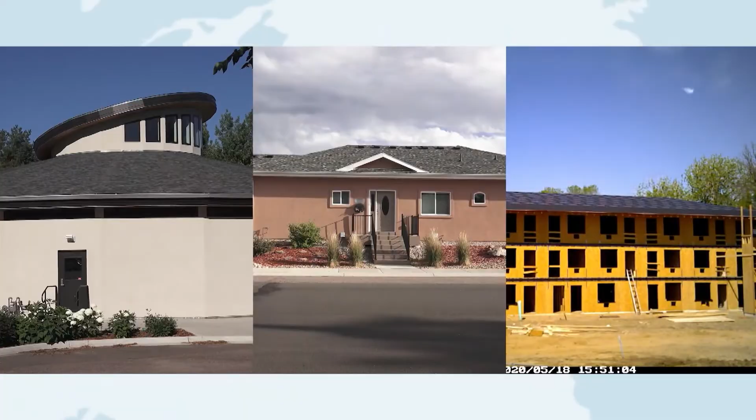Hi, I'm Paul Kriescher. For the past quarter of a century, I've worked to create more energy efficient homes and buildings. I'm fascinated by the technical aspects and cutting edge ideas from people who are pushing the boundaries in their projects. Equally important to me is the why behind the plan. What's the motivation for these individuals to make the effort, take the time, pay the additional money to take on sustainable and regenerative design and construction in their projects?

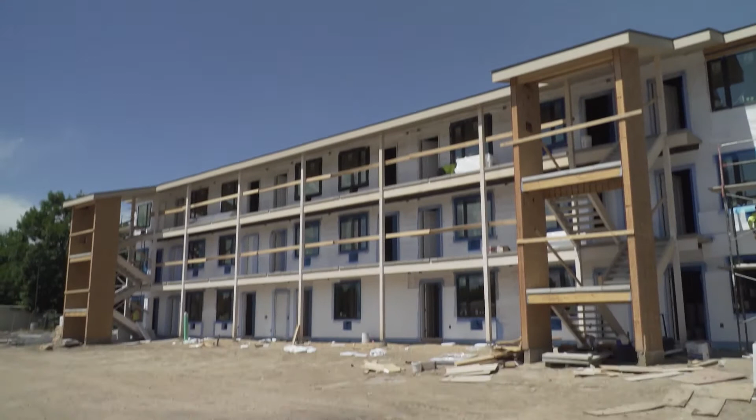We're going to take you on a journey to explore 3 unique construction projects: a church remodel commercial building, an innovative single-family home, and an exceptional multifamily building. Explore the design and the desire for each one to be examples of creating the buildings of tomorrow today and to leave the world a little better than how they found it.

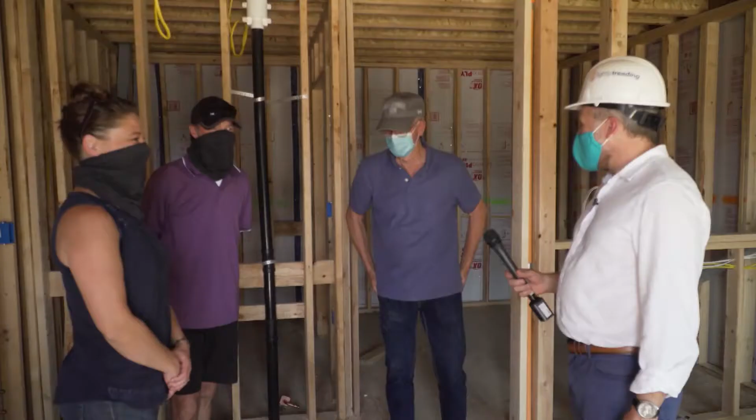When we recorded this video, we were 4 months into the US response to COVID-19. Shortly after restaurants began to open, but steps were still being taken for social distancing, and you'll see me and interviewees occasionally wearing masks as we move through these buildings. These precautions were done to protect the well-being of others and reminded me as to how we are all connected and need to truly care for one another as we move through life.

This connection between all of us is the fundamental reason for our videos, to showcase buildings which provide for our and all creation's greatest good by using less resources while delivering optimal performance for the occupants. May we all be well.

First Universalist Church members in Denver are a great example of living their values through the renovation of their building. The whole congregation got together and decided to shoot for zero emission, not an easy or cheap goal, but one they truly believed in. Let's head inside and find out more from these amazing people. We're talking to church members John Bringenberg and Milt Hetrick, Reverend Dr. Elaine Paraslua, and Communications Coordinator Jessica Montgomery about their goal to design a zero carbon footprint building. And while this green light has nothing to do with sustainability, it's a very cool design feature. Find out what it is a little bit later.

So Milt, if you'd be so kind, you have a brilliant mind in applied engineering that you did in helping this project come together, but tell us a little bit of your background, all the good street cred that you had through the schooling and work that you've done before quasi-retiring and then working on a project like this. Well, I got my engineering degree in aerospace, and I spent probably the first 10 years in aerospace. Left the industry and went into the oil and gas field for about 3 years. Was involved in some oil shale technology. Then ended up going back to aerospace where I retired. And in the meantime, I also got a degree in physics. So little did I know I was going to be applying it to a church project. And you did great work with it.

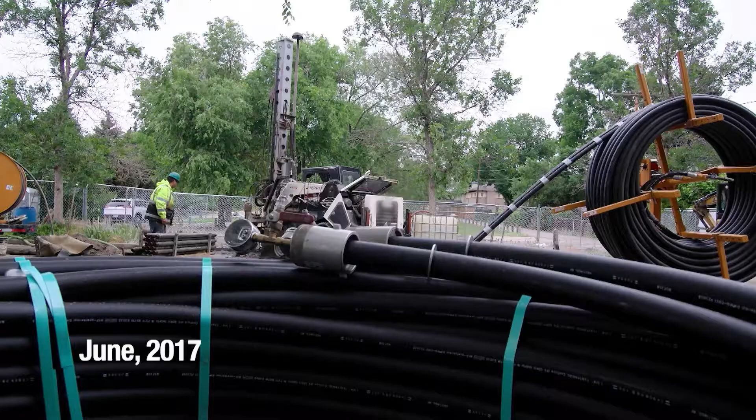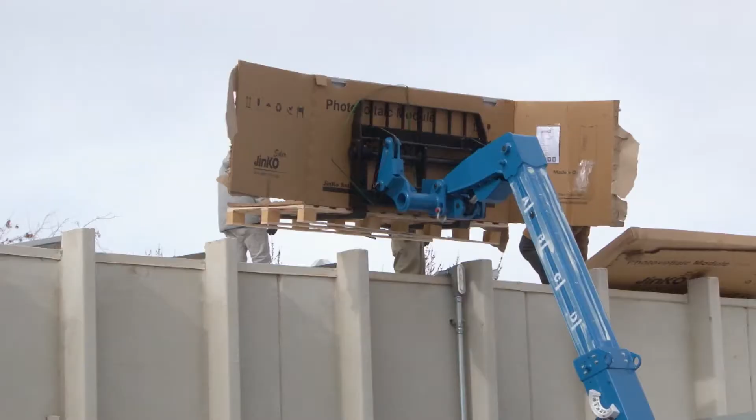So related to the church project, can you tell me briefly why you, the congregation, the people working on this, chose to do such a high-performance building instead of simply meeting code, like so many other projects? Sure. This project, we have to kind of go back and recall that it got started around 2015. And at that point in time, the global community was becoming very concerned about the climate crisis, global warming, and that was the year of COP21 and the Paris Agreement, where the global community made an agreement to reduce greenhouse gas emissions and limit global warming to 1.5 or 2 degrees. So that was the big picture that was going on at the time this project got started.

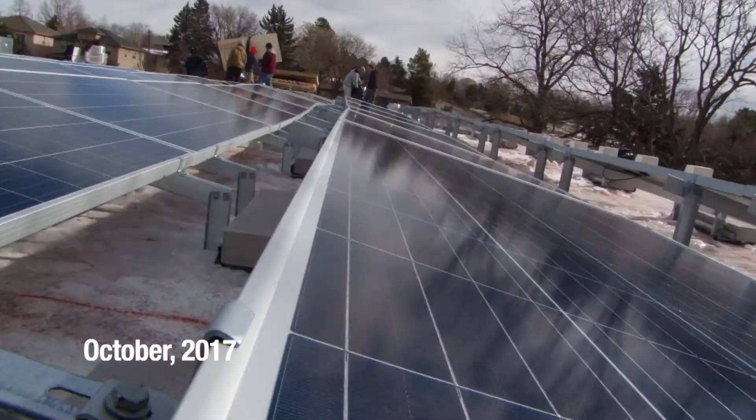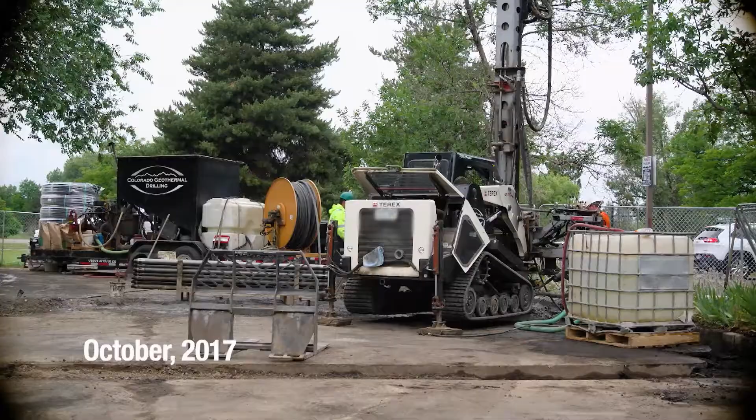Now, if we come down a little bit, our religious denomination, the Unitarian Universalist Association, had published what we refer to as statements of conscience. Within this church, we had a small group of environmental activists that we called ourselves the Green First Task Force. We were concerned about the growth of our congregation and that we needed more space, more classrooms, a bigger sanctuary. And so we initiated a building renovation project. And one of the members of our task force, John Bringenberg, got himself positioned on the building committee and made sure that we had sustainability perspectives as design requirements for this renovation project.

You know a lot about this building, about the whole process, but what I'm really fascinated by in this project was the why people came together to do this great project. When you have a church community, you have a unique people environment to make decisions of this kind.

We, of course, have to think about the economic impacts of energy decisions when we're redesigning this building. But being in a church community, you have the opportunity to bring in another dimension, something that maybe doesn't exist in a normal commercial business, for example. And in our case, that's what we call our seventh principle.

This amazing building is a manifestation of many beautiful principles and values that come from the Unitarian Universalist Church, and I'd love to learn more about that. I would say the general value of Unitarian Universalism is to live your faith, to live out the principles, and we have 7 of them, and they are about democracy, about how you treat one another, the dignity and worth of every human. But the one that's important to this project is the 7th principle, and that one is we are all part of an interdependent web of all life, and that we are to recognize our equity with all other beings, sentient and not, and the earth, and to care for the earth as stewards.

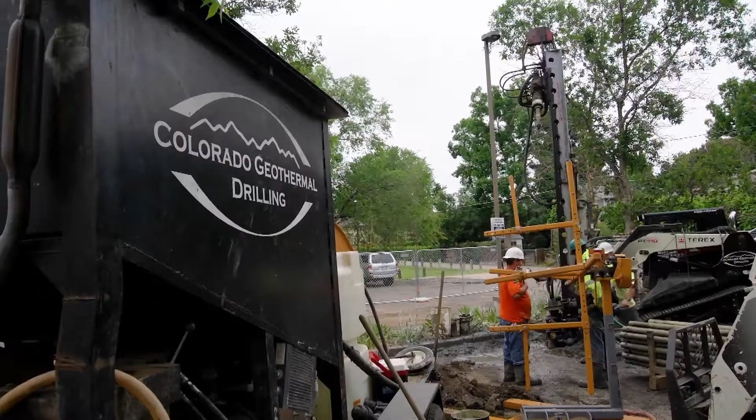Can you tell me a little bit about the story and the process of how people came together, especially around the funding portions of this project, to make it happen? Because it's a great story. It is, yes. We had a capital campaign for the building renovation well underway, and working with the architects, when a member-driven initiative, a very bold one, came up to add a sustainable energy system, and also add the cost for a sustainable energy system. It's challenging for several reasons. First off, it added more than 10% to the cost of the total building project. And being understandably debt avoidant, the church just asked, can we go ask for additional gifts specifically for the sustainable energy system, and then close the gap as needed with a member loan.

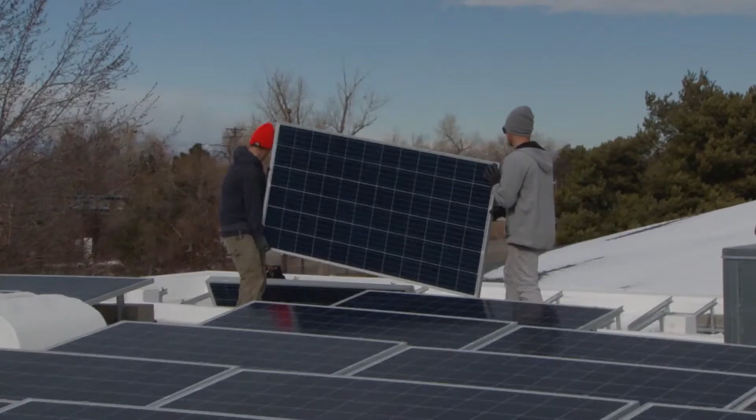So the community, as I heard it, came together and said, we're not going to try and get the maximum dollar out of the church that we can. We want to give a gift, but we need to get our money back, plus get 1.5%, you said, interest on it? Right. In exchange. That sounds like a beautiful win-win. Yeah, we thought that was a rather unique approach, because going in, the first response we got from just about everybody was, we can't afford that. Yeah, member-led, member-driven effort. We exceeded our goal in the additional member gifts, specifically to add the sustainable energy system to the building project. And then with the remaining funds, members came together and formed a general partnership, the 7th Principle Partnership. Cool. And that bold move paid off. We were able to see the project completed.

You were heavily involved in many of the technical aspects of this project. And I had the pleasure of working with you guys and being involved with doing air tightness inspections and blower doors and things. But can you tell me a bit about what you chose to do, let's say starting with the envelope of the building? Okay, great. This was a retrofit, so there was about 20% new square footage added to an existing building, which was restored and rebuilt. But in doing so, we were able to get nearly the entire building envelope with new insulation, including a skim coat of foam on the outside, batt fiberglass insulation, to bring us to about an R30 value in the walls.

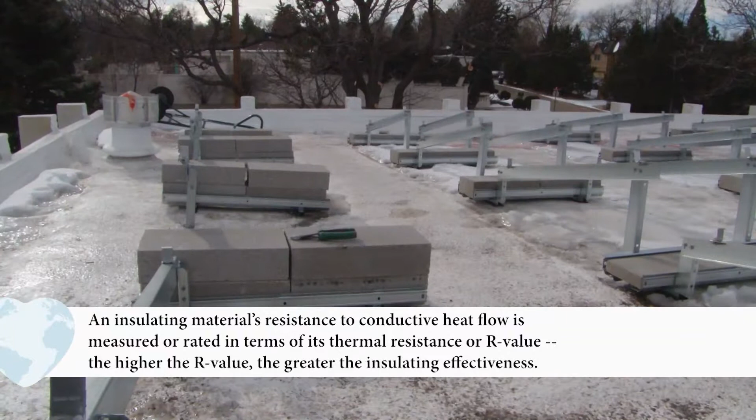Which is great. We have a flat roof for most of the roof on the building, including the original parts of the building. And we were able to really beef that up. And we went from having about 2 inches of solid foam insulation to having about 6 inches, bringing us to an R value above 50. Which is really amazing, because your beginning levels, you were closer to like an R14 or R13 maybe, and to be above R50 up there is just outstanding.

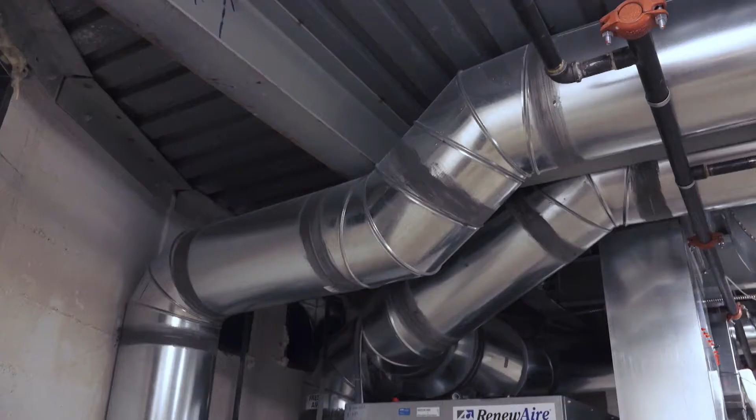In the design of the envelope, airtightness, making the building tight, was really the first parameter, and the R value was really a secondary parameter. We employ, for the first time in this building, 5 ERV units, and those ERV units work hand in glove with the envelope being as tight as it can be.

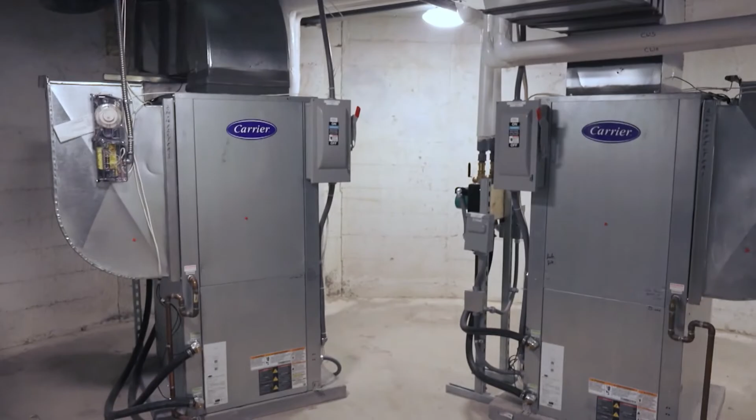Yeah. And one thing I can share, since I did the testing, is that the building came in at a test level of 0.188. Wow. CFM per square foot at 75 pascals, which is amazing, because code for new construction, not a remodel, but new construction, is 0.4. So you were less than half, as far as that standard goes for new construction. So you guys did some really good stuff with that part of it.

If I may, I want to ask you to get a little more in depth about the ground source heat pump system, the technology, because it's a new enough technology. I mean, it's been used in the Midwest for a decade or more, and in other cases, but it's still an exception. We don't see it in enough projects, and so you were quite innovative to bring it in.

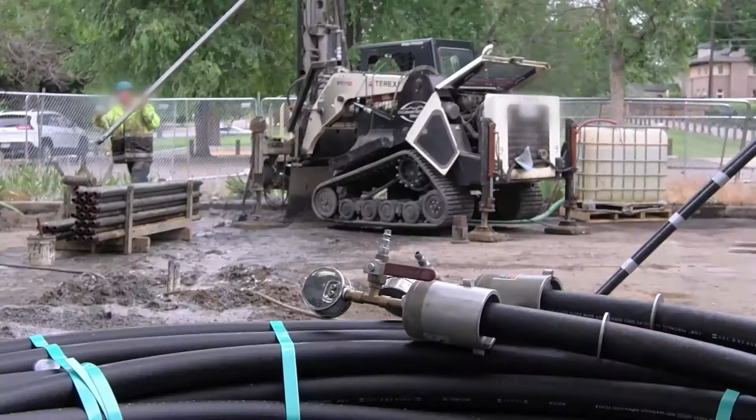Well, if this were a new construction and we didn't have a parking lot paved and landscaping in, we probably would have selected a so-called horizontal installation of these heat exchange pipes. Right. It's the cheapest way to do it, but... And how shallow or how deep would that have to have been? Well, they probably go down 6 or 8 feet. Okay. The alternative is to drill 5-inch diameter holes down and insert black plastic pipes in a vertical manner.

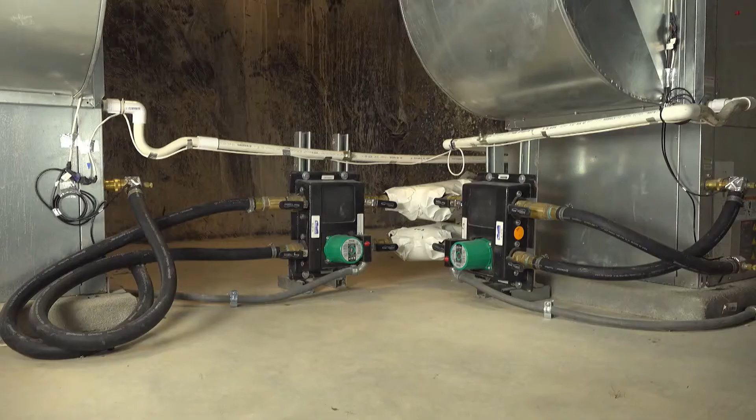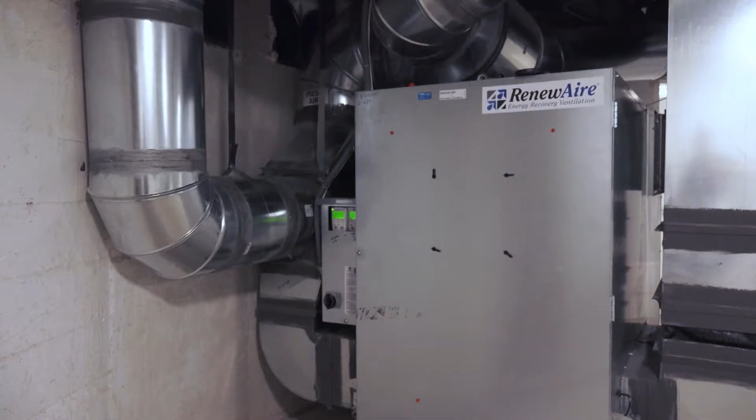The materials that you have in this building, the pumps, the piping, even the air handlers themselves with the water connecting back into the air handler from the ground source loop field, are really off the shelf. I mean, they're just common products. There's nothing that's incredibly innovative with that part of it, which is great. Makes it easy for repairs and things like that going down the road.

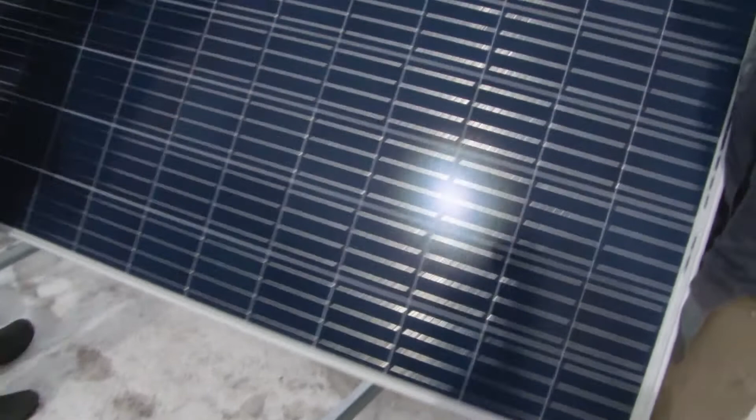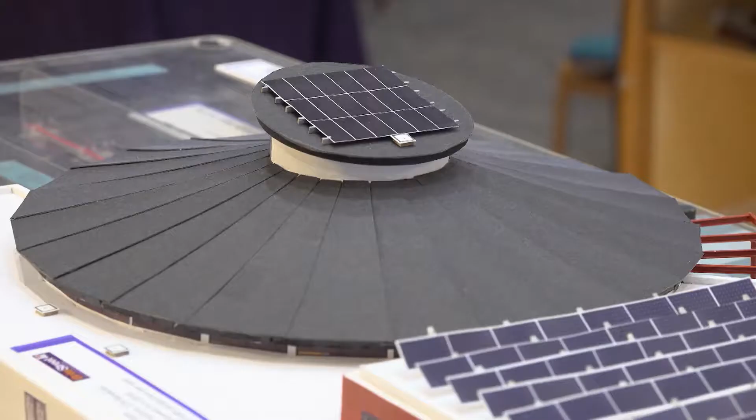So you were an integral part of having solar PV, photovoltaic, put onto this building to power a tremendous amount of this building's need for energy. So can you tell me a bit about the system you chose and how much it's helping offset right now for you guys? Yeah, thanks. We knew that being able to generate electricity on site was key to our goal of having a zero carbon footprint building. We planned a system that was designed to cover approximately 100 to 105% of our projected energy needs.

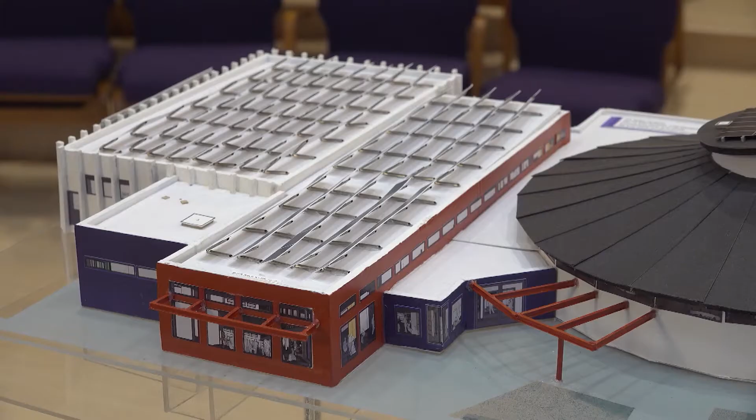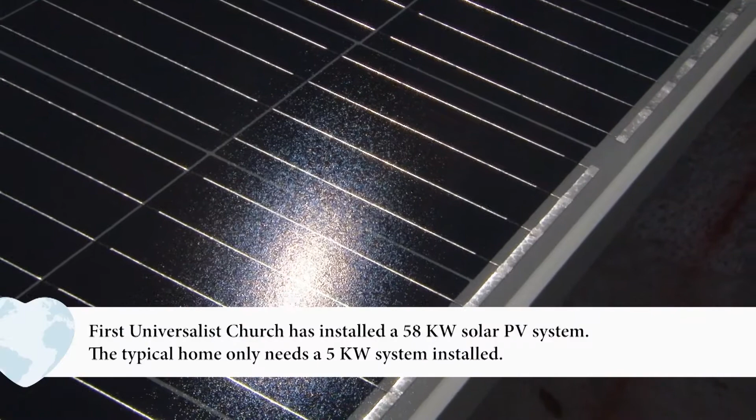Yeah, that's great. And we used about 80% of the space on the roof to accommodate that, so we knew that we had a little bit of room to grow if needed. We have a system that is about a 58 kW system. It generates between, we'll call it 80 and 85,000 kilowatt hours of electricity per year. And we're now finding, after over a year of usage, that we may be a little shy of 100%, and we have the space on the roof to increase the size of that system to make sure that we are at 100%.

And that's being given serious consideration, that you may add to it in the near future? That is correct, because we set out and the congregation agreed to a goal of being carbon neutral, and that's part of that equation.

So John, tell me what this great performance boils down to in dollars and cents for you on your utility bills on an annual basis. Our historic bills on the building, which was a little smaller before, were over $20,000 per year. We are now spending about 20% of that amount with the new systems in place, and I would say that the vast majority of those charges are base charges and demand charges. That's fantastic. That's really fantastic.

So there's some beautiful things that you did with daylight in here. The architects that helped design the building placed a high value on daylighting and did their very best to bring daylighting into every common space in the building. That was very challenging in the lower level, which prior to the remodel was a typical church basement with very small edge windows. But they were successful at getting some daylighting there.

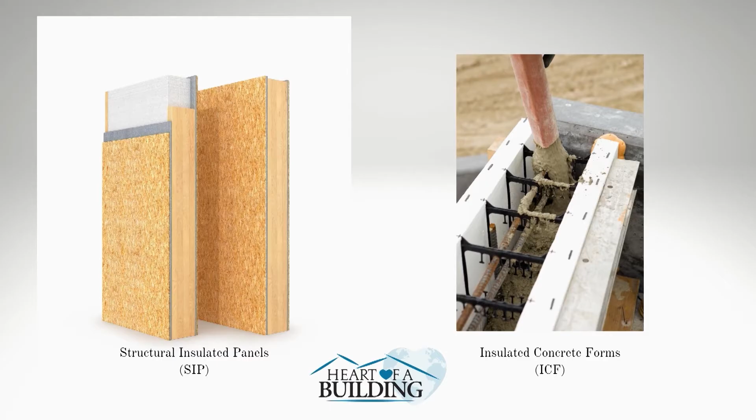So when you started building the home, the thermal envelope for it, tell me some of your choices and why you chose them. We evaluated the conventional construction, which everyone has done for many, many years. We evaluated some of the SIPS panel stuff. We did the ICF. So an ICF, insulated concrete form, it's going to have, in your case, 4 inches of foam. 2 5/8 on each side.

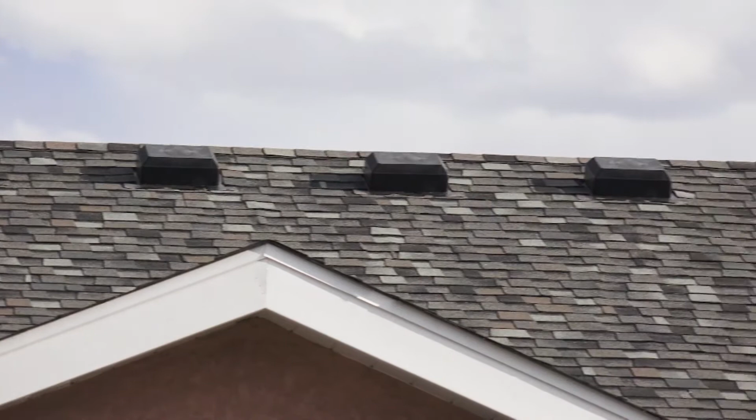2 5/8 on each side, and then concrete in the middle. Yes. Poured in on site. Right. And so we're insulated concrete forms all the way to the trusses. We have high-heeled trusses. And so we sealed all the trusses from the concrete up to the baffles, up to the airspace for ventilation in the attic, with foam. So that is all sealed because that's the biggest culprit in the house, heat transfer and air infiltration. And so we kind of covered all these little details.

I've been working with energy raters like yourself through the many years, and with their cute little infrared cameras, and when we do the studies and we do the blower door tests, you can see many different things over the years. Right. And so we've pretty much put all that together in one package.

Hey, Paul, come on in. Hey, Wes, thank you so much. Good to see you again.

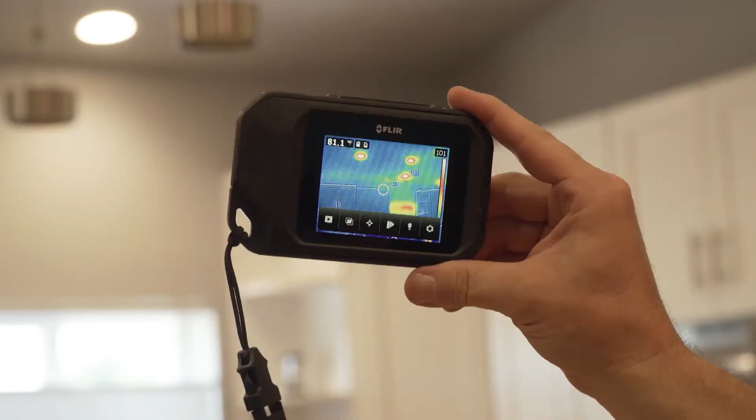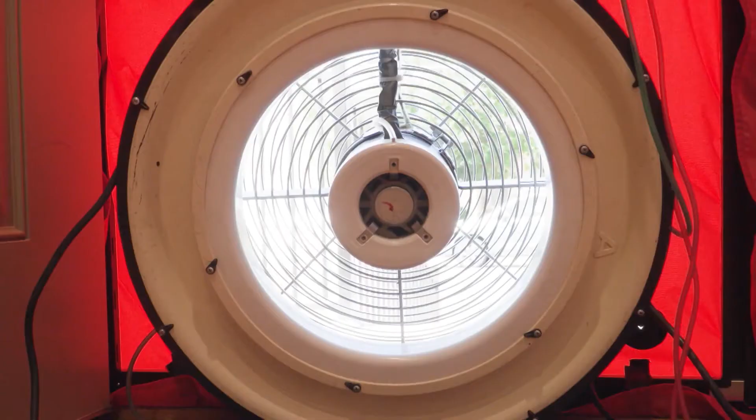Tell us about what you did with the windows and how you decided to orient the windows and orient the house, really, for the passive solar benefit. We set up the houses in the whole subdivision to best access our southern exposure. We use triple pane windows with argon gas. We use special window bucks compared to what most ICF builders even use.

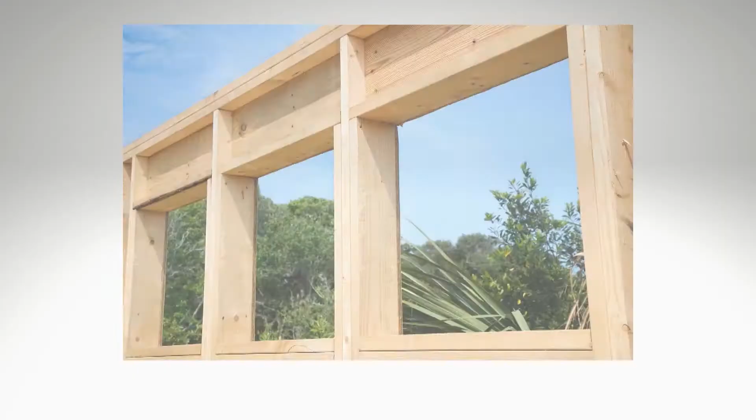We personally build those and we insulate them, because a lot of them will put the wood window bucks in, and 25, 30 years from now, all that condensation has collected in there. You slam the door, the window falls out. Exactly. It leads to a lot of thermal bridging. It leads to a lot of air infiltration around there, which we've eliminated. You happen to know the U value of the windows that you installed? The fixed glass in here were 0.20. Okay. The operating glasses were like 0.21 and 0.23.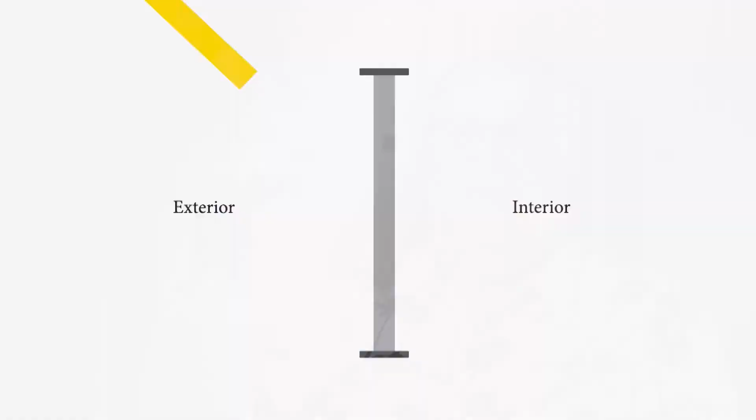Extremely good. And then, as I understand it, you did some different solar heat gain coefficients with the glass on the south side versus other sides of the home. Is that correct? We very specifically picked glass that will allow solar gain for us in the wintertime. Nice. And so we can have quite a bit of BTUs of solar gain in the wintertime, and in the summertime, the glass reflects it off, and we don't get much gain out of it.

I'm going to guess, tell me if I'm in the ballpark, I'm going to bet the windows on the south side are letting in 55 to 60% of the sun? 56. 56, good. I'm in the ballpark. That's good. And then on the other sides of the house, probably only 25, maybe 30%? I think we're at 31 or 32.

Okay. I like the way that they designed this side of the home to be cool in the afternoon. So my patio is such that about 4 o'clock, 5 o'clock, there's a shadow there. Right. The way they shaded the home. And I said, that's so smart. You know, I used to have a retractable awning at my other house. I don't need that here.

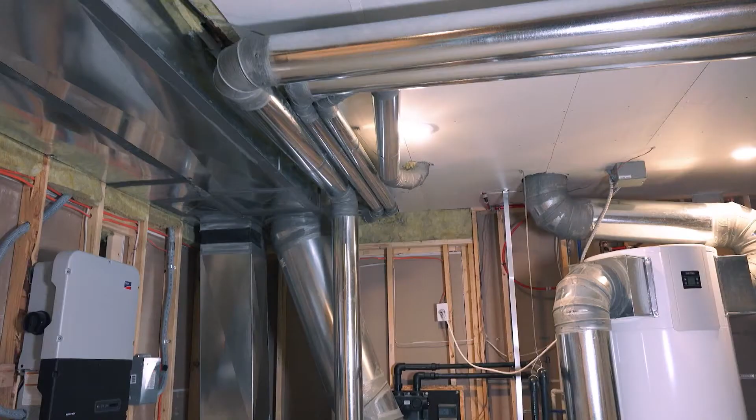My fascination in having known you and worked with you over the years is what you've done in alternative ways, once you've built a great envelope, to heat and cool it. And you've done some really good things here that aren't done commonly. You have a ground source heat pump system, so I'd love to hear about that. And then I'm going to ask you about how you went about sizing it, because that's part of the beauty of what you do with your projects.

Ground source heat pump is the most efficient system; the EPA determined that many years ago. Ground source heat pump is the most efficient way to heat and cool any building that there is.

Tell me a bit on this one. How did you choose to install the system as far as the bore field went and some of those details? In order to size any kind of bore field for any system, you really need to do a good heat loss calculation. I've worked with many mechanical engineers over my lifetime, and they will do the heat loss calculations and they'll be double of what they really actually are. As far as the size of the equipment? Yep. And so by putting in oversized equipment, you take away efficiency.

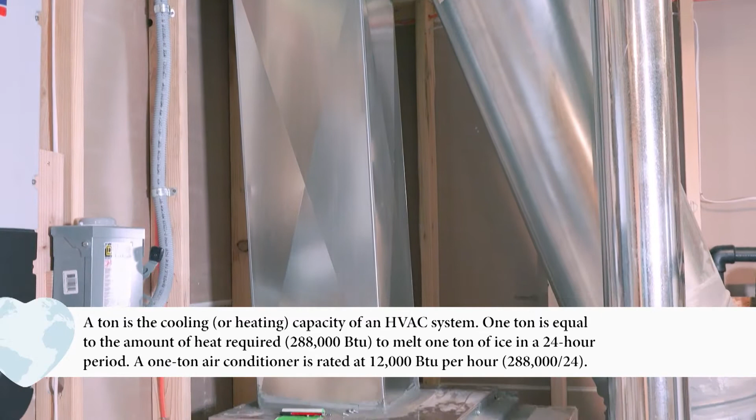It's like taking your little car and putting the biggest motor you can stuff under the hood and punching it at every stop sign. Right. That's the same effect. What's the size of this system approximately as far as the tons? 2 ton. 2 ton cooling. For a home, how big? There's 1,970 square feet per floor. So a 2 ton system.

I've done enough load calculations, I bet the software I would use would say, even with your good envelope, at least a 4 ton is what I would have gotten from the calculations. Am I right? That's right, that's what the software comes up with. Yeah. Then for safety, you needed the ERV.

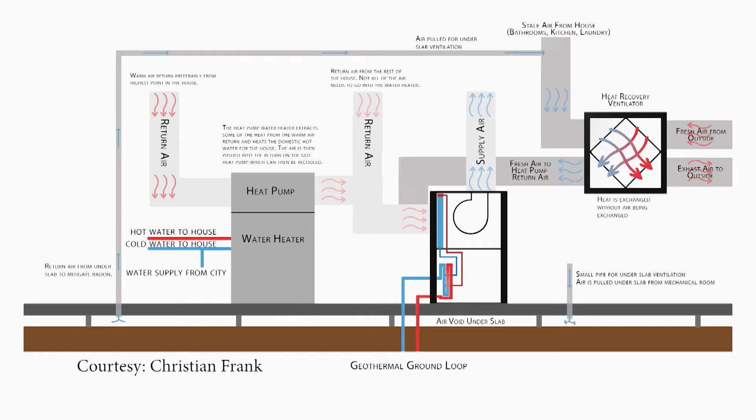So tell me about some of the cool design features you have built into this house, how you have air moving through this home, especially underneath the basement floor deck. We have a unique situation here where we had some expansive soils. And so we have a foundation that is lifted off the dirt. And it sits on stilts, right? Wood? No, it's concrete. Oh, concrete, okay. And it's lifted 6 inches off the dirt. And so we got a void space under there.

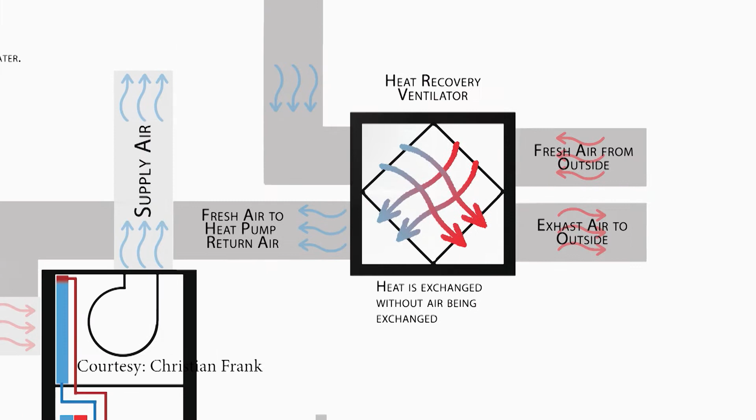In that void space, I have airflow that is connected to the HRV. And so we have constant temperature air from the mechanical room, which is where warm stuff is, water heater, furnace, things like that. So we pull that warm air from that mechanical room where we really don't need it, and we pull that stale air underneath the slab with all the radon and all that wonderful ugliness that happens down there, soil gas, and we dissipate it outside.

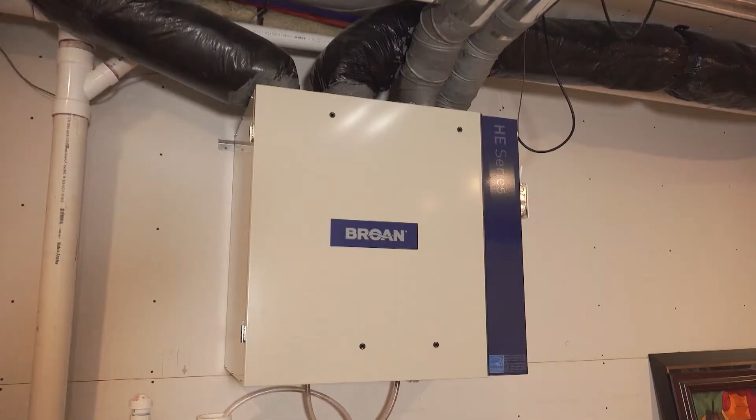So the ERV itself that you chose, who was the manufacturer, why'd you choose it? Then how do you have it ducted in and around this home? It's actually a Broan HRV. It's an HRV, a heat recovery ventilator. We chose the HRVs because once you seal up something this tight and mama starts cooking for Christmas and making a hell of a bunch of steam in the house, you need to dissipate that moisture. And so that's why we chose the HRV.

And so we have sensors in each one of the bathrooms, the laundry room, and the kitchen. That's where you make your pollution mostly. Doing laundry, cooking, going to the bathroom, taking showers. And so the HRV runs at a continuous flow of like 68 cubic feet per minute to keep the air fresh in the house. Once you step into a bathroom or the kitchen or laundry room, it'll ramp up to 200.

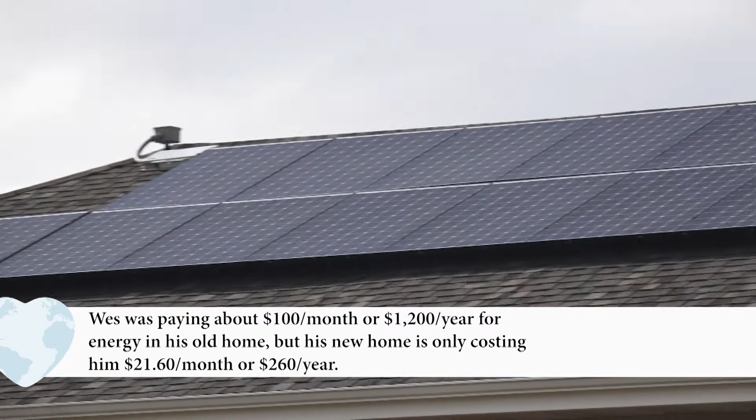So Wes, as an accountant, I love this about you. You've been tracking the data on your utility bills and how your solar PV system has been performing. My other home was a little over half the size of this one. But that house had about a $100 a month average utility bill. And this house in 2019 had a utility bill of about $260 for the whole year. That's fantastic. And I get cooling in the summer, whereas the other house was hot in the summer.

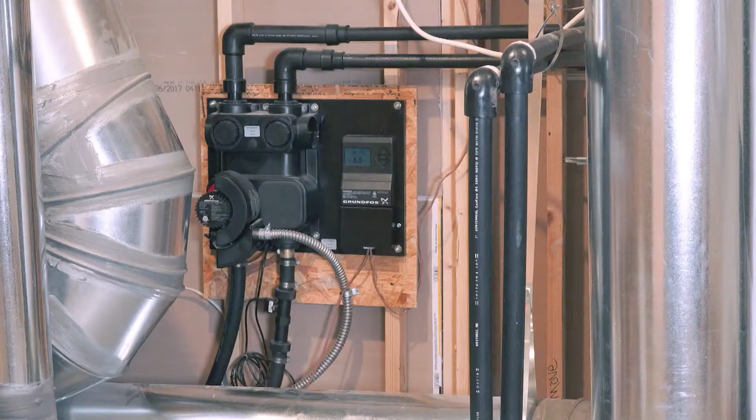Tell me a little bit about this electric air source heat pump water heater that you put in. It comes from Germany. They have been using them in Europe and Japan for 25 years, because their electric rates are 3 times what ours are. And since we were going all electric in this house, I explored quite a few different manufacturers and came up with this system, but they don't sell the airflow kit in this country. They only sell the water heater. And so we had to make up our own airflow kit. And the airflow kit, just to interrupt, it's because it was an air source water heater.

Okay, it's a booster fan? It was a booster fan, a very noisy, holy crap, hold on to your hat booster fan. There's a high return at the ceiling. Right. We're pulling the warm air off the ceiling where you never heat it. Right. In the summertime, you're getting radiation through the insulation even. Right. So you've got all this warm air stacked at the ceiling.

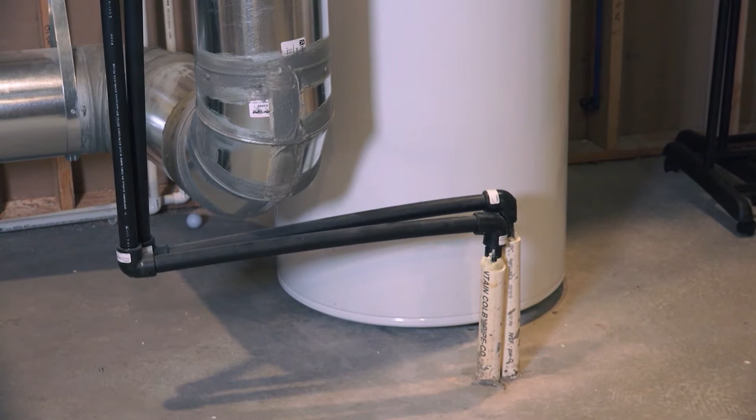Right. And so when the water heater needs heat, it starts pulling that warm air off the ceiling, runs it through the water heater, extracts 6 degrees of temperature, and deposits it into the return of the furnace. Oh, okay. There's refrigerant coils that go around the tank in the water heater, and so that's how it exchanges the heat. And all these things are amazing, in my opinion, in this home. And you've built an all-electric home that is affordable.

Tell me a little bit about why you did this. Why an all-electric home? To prove that it can be done. Okay. Because people are telling you you couldn't do it. Everybody says that in order to do what we're doing, it's going to cost several $100,000 more.

So Wes, you've shared enough with me over time that we've known each other about how you care about many big picture things, whether it's connected to your church, things with working with underprivileged youth. Seems like that's part of your decision making in getting this home. Am I right? You're right. I hate to admit that, but yes, you're right. That was part of the decision making with the home. I've always felt like if you could use less resources, you're going to help the environment.

And I went to an energy conference at First Universalist, I think it is, and really learned more about the impact that using energy here has in other places, in poorer countries. And so I didn't realize how much of what we enjoy hurts others when we're irresponsible about it. So that also had an impact on my decision to do this, because I didn't need a house.

I had a house paid for, I was retired. So value is beyond the ledger sheet. I know. I'm probably going to lose my CPA license. But yes, there are valuable things besides money. There's people's lives and their well-being. I'm deeply impressed by the passion of this builder and this buyer to have high levels of sustainability in this home that is attainable for middle-income people in our country.

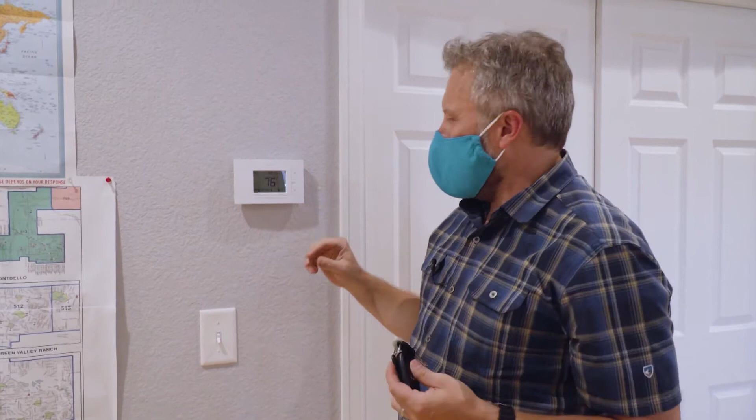There we go. So, the house actually cooled down by a degree while we were operating the blower door, which is pretty fascinating. Wow. Thanks to Wes for allowing us in his home and sharing some of the wonderful design features, and to Con for taking us through his thought process. And thanks to both for sharing their why behind sustainable living. Up next, we're headed to a multifamily project currently under construction to get a first look at their sustainable design elements. Come on, let's go.

This multifamily project is going up right now in the city of Longmont, Colorado. It has some very cool design and specification features which the performance consultants, Cody and Lisa Farmer at Mainstream Corporation, and the developer, Gary Kinsey, are really focused on getting the thermal envelope, that's the air tightness and the insulation values, to be far closer to the passive house performance than mere building code. Let's hear their whys, and let's go check out this great building under construction right now.

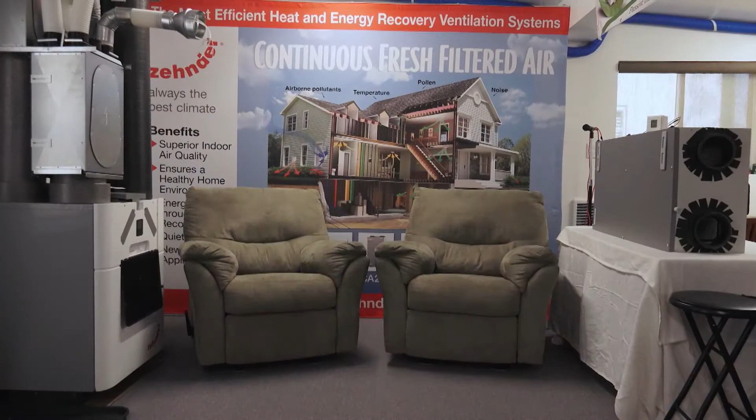Mainstream Corporation's office is a converted barn in the shadow of Long's Peak. It's turned into a passive house compliant building because of a sealed envelope and a mechanical ventilation system that purifies the air. Find out just how quickly the air is purified later in the program.

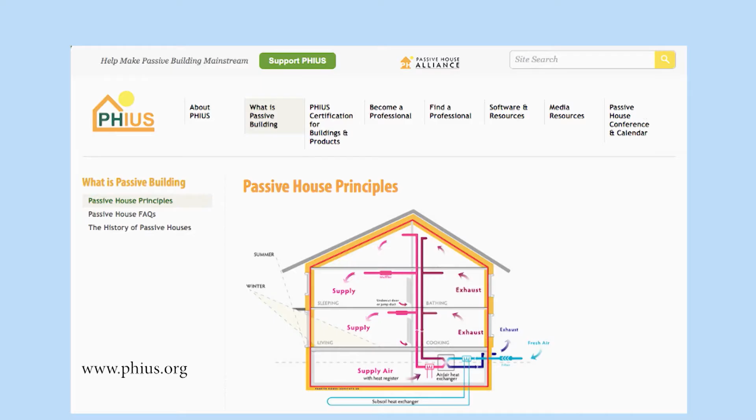The two of you are doing some amazing things when it comes to making buildings more airtight, encouraging the whole passive house standard. Why are you leaders in moving this forward? I think Lisa and I founded Mainstream to make things better, to fix things that we saw that were wrong. And so the why is simply because we see that the current building stock is wrong, and because we have kids, we're building for the future for them.

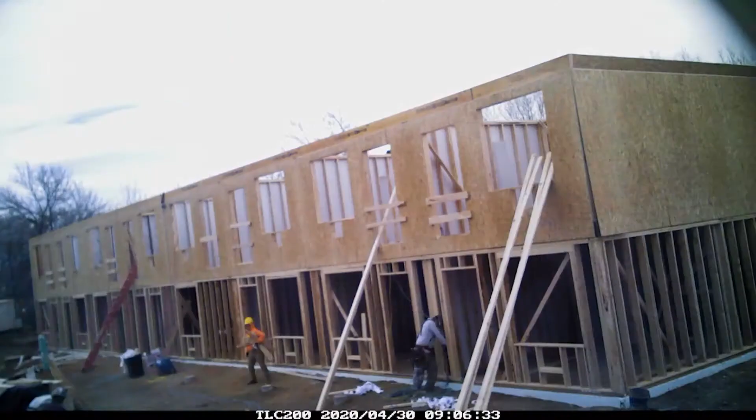You guys have several projects, but we're focusing on this under construction Greenspire project. Yeah, the owner's amazing, and it's a project that lit up Mainstream's interest level. When I met Cody, he enjoys this, and when he saw what I was doing, it just excited him. He was just all for it. Finally, we had somebody who was receptive to the science, who asked the right questions, who was doing it for the right reasons. On this scale.

Right. Probably something that really made me work on it hard is I told a lady at our church that it was impossible to build a 450 square foot unit, the restrictions would be so great and the expense would be so great that it just was impossible. She got a project through the city called the Micah Homes that are affordable, through a group called the Inn Between, which provided that type of housing. Transitional from homeless into some sort of housing?

Right. So she did so much to help affordable housing. She broke the mold because mine are 300 square feet, and when she started, the city required 450. So she has helped, and so this was something that I needed to do for her. Is this project going to help people coming from homelessness into transitional, or is this meant to be more of a market rate?

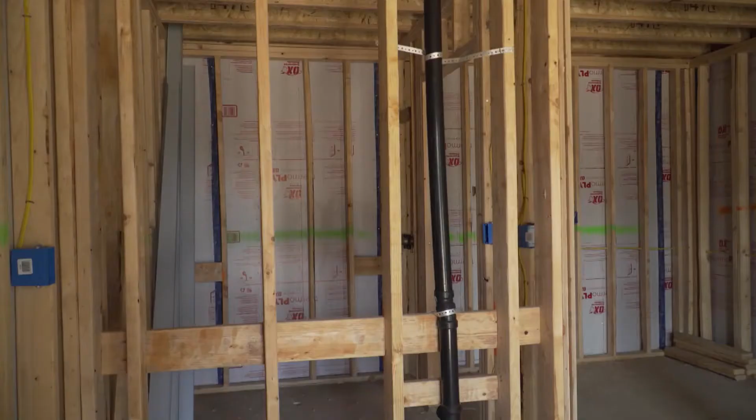We are tied in with the city with 10 affordable units that we have to meet certain requirements. But because of the way they're designed, only 300 square feet, they are all well below the city's requirements. And that is the secret to affordability. Is its size? It's the size. Well, at the original, 2.5, 3 years ago, 450 down to 300, that's 30% smaller. And that lowers the cost 30% for rent. Its size is a factor.

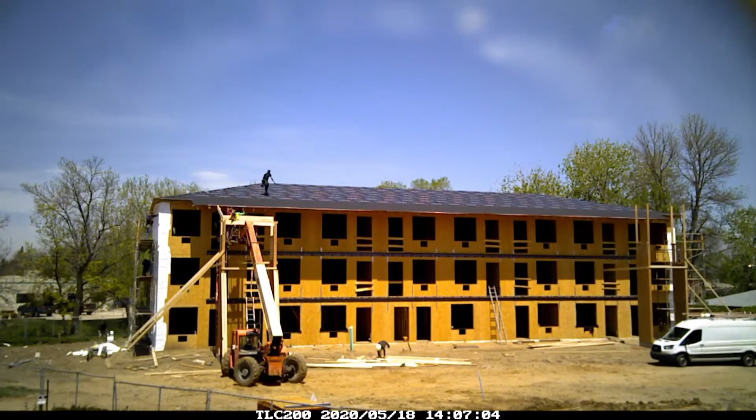I didn't have 44 of these built without knowing what one looked like. So I built this unit in my basement. That's awesome. Because you just don't want 44 of them there. So you tried out how it would feel to live in that, right? Yes. So, we had several principles. It had to be viable economically and investment-wise. It needed to really do something about the homelessness. And to me, it had to be 21st century. The code is so far behind and technology is moving so fast ahead.

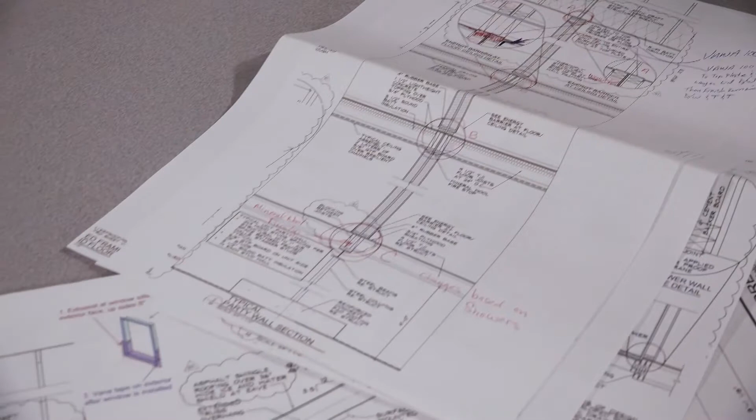I have to interject that you, at one time, were a building inspector, correct? So you know the code really well. I spent 11 years in code review and building inspection, and it's not keeping up. So I wanted a 21st century building and renewable energy. I do not want to face my grandchild knowing the mess that I've left him. I'm responsible. No, you're responsible. We're all responsible, and I've got a few years left. Maybe I can correct a little bit of it.

Now, before meeting Cody and then Lisa, had you heard of Passive House before? Not Passive House. Passive House has its own modeling software. Passive House Planning Package is how it started. Internationally, they still use it. And then with all the climate zones in the United States, the United States Passive House Institute created WUFI Passive. So that's the software program that I've... What does WUFI stand for again? W-U-F-I, yes. I'm sorry, but it's in German. It's probably safer if we just spell it and leave it at that.

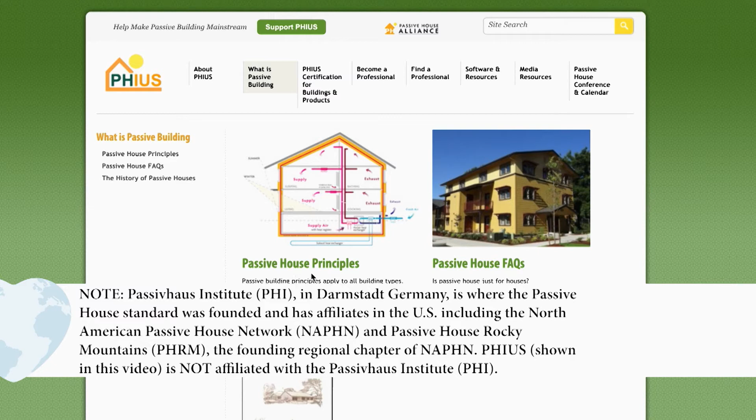It's a hygrothermal model that's parametric and is attached to the elements of the WUFI Passive modeling program. So it does what other Manual J softwares do as far as heat load calculations, but it's more accurate. It takes air tightness seriously. It incorporates internal heat gains. When you get down to the micro loads, this is the software that we should be using. She likes gritty language and spreadsheets and fancy graphs, and she's very good at it.

But beyond that, she gives our clients an opportunity to just ask anything they want about their building. For example, what if we switch the insulation because this insulation is more friendly to the environment? Right. Or this insulation is cheaper and I can use it in recycled form. Right. And all those questions can happen a phone call away.

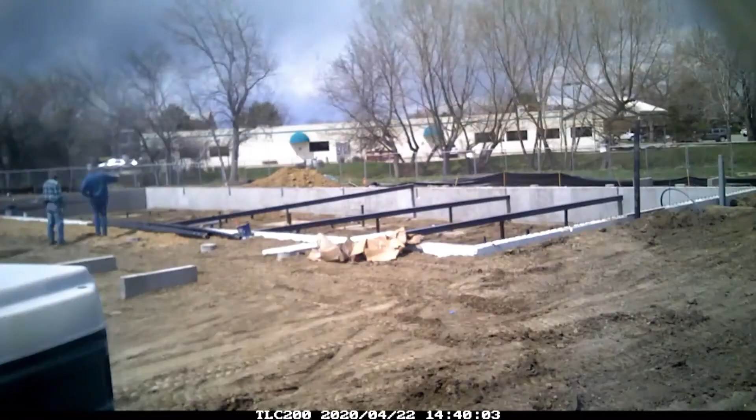So Lisa, you've told me rules of thumb for passive house: the idea of an R40 underneath, an R50 on the walls, R60 for the ceiling or attic. For Greenspire, you're really close to that, but what'd you end up using, and then why? We are very close. We're about R38 where the floor meets the crawl space. Nice. And then the walls, we did push for a little bit more rigid insulation than we got, so we landed at an R30. Okay. We have 2 inches of rigid foam on our framed walls. Nice. And then the roof itself is an R60 as well.

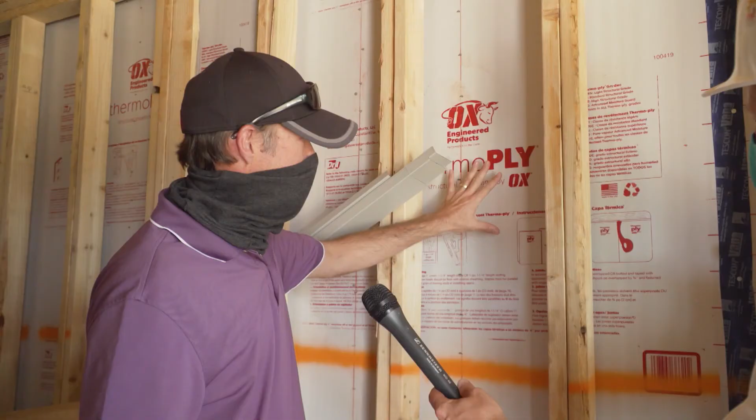And then each of the units is airtighted from each other, trying to stop the smell of people's food drifting over to the place next door. Yes. Very nice. Lots of design meetings taking those details into specific consideration. This team has already done more on this airtight detail than you'll see on the average construction site. We'll come back in here and button it up even tighter because we want passive house air tightness in each of these 300 square foot units.

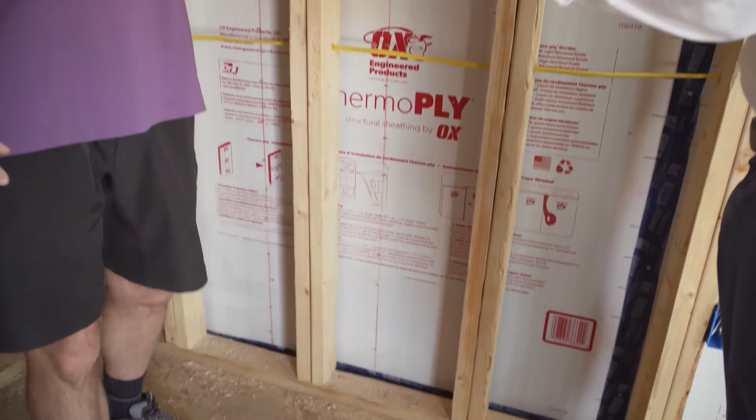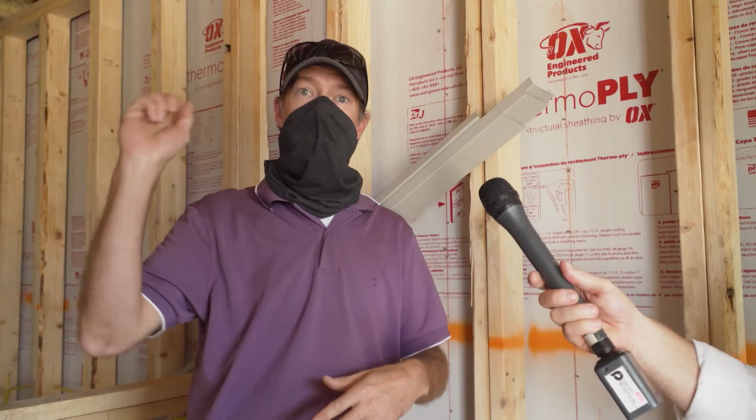So a quick air barrier inspection that Mainstream would do would be to come in and see what is the continuity of the air barrier, and that means is everything connected properly on all 6 sides of the building or the area that we're in. So move on over here. We use Pro Clima vapor open tapes, and the reason is because people sweat and they breathe and they cook, and so we don't want anything getting trapped in our walls.

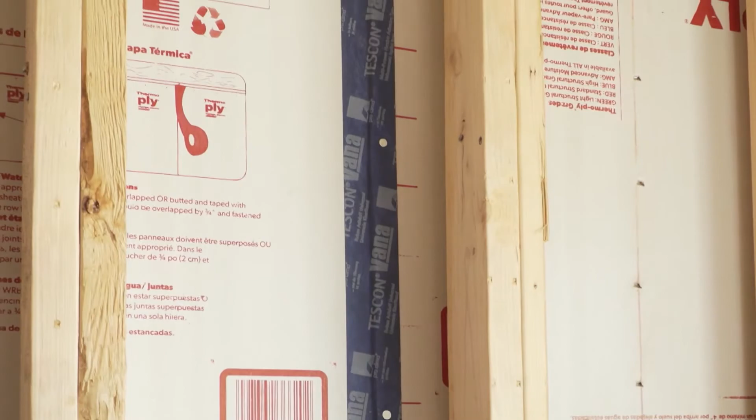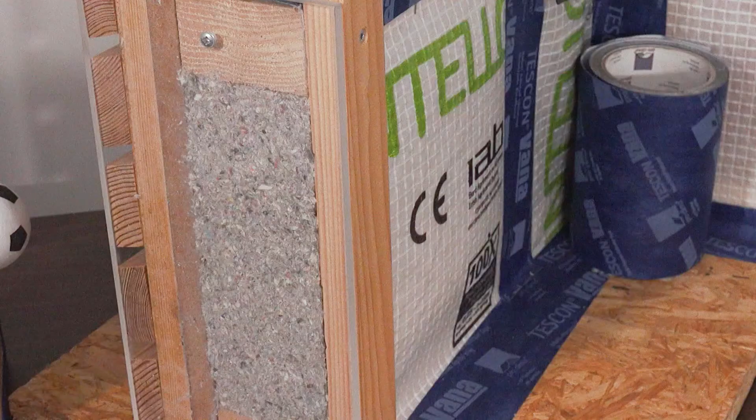And then the walls, you got 2 inches of rigid, so XPS, is that correct, on the outside? EPS. EPS, okay, so expanded polystyrene on the outside. Good. So that's about an R8 on the outside? Yep. Then what do you have in the wall cavity? Cellulose. I think the cellulose argument's a really good one, and that's something that can change in the field. It's common that as passive house we'll spec cellulose and we'll end up with blown-in fiberglass or something. We like cellulose because it's a recycled material and it's very anti-rodent and bug. I agree. Fiberglass rodents don't have a problem with, but cellulose they don't like, the borate that's on there.

But dense packing it in, it'll surround all the wiring and everything. It's very tempting, you'll see batts in normal situations, go in and slap them in, but then you have little air pockets, and that's the other part of our science: we don't want any air pockets in any of our assemblies. This is how we do it.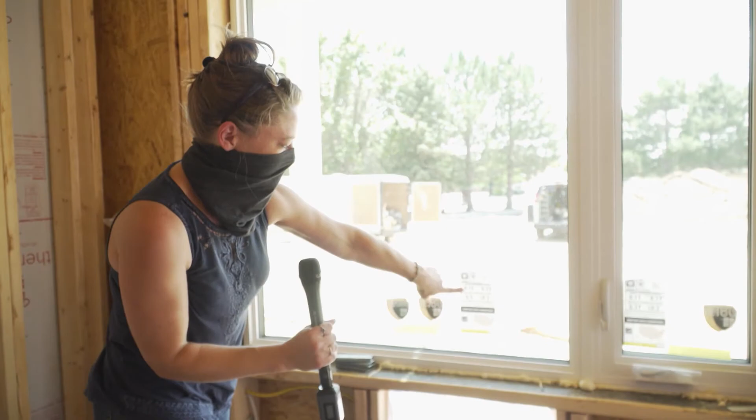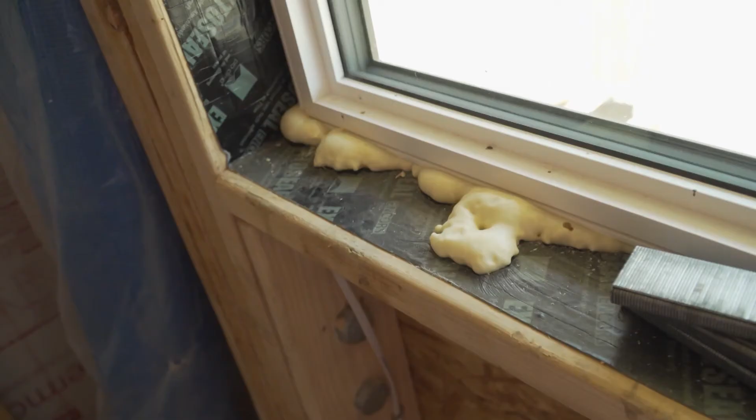Yep, that's excellent. And then for the windows. We started with Alpine in the design process, but now we have Gerkin windows in there. They are less than 0.2. This one's 0.15, it's fixed. The operable one is 0.17. Those are excellent windows. Energy Star in our area requires about a 0.3, so much better than that window. 0.2 is where we're targeted. We went from a fiberglass to a UPVC, and the budget savings was significant enough. For the framing of the window? Yeah, UPVC versus Alpine's fiberglass.

And with all of this, we were almost certifiable for passive house. The heat load is the one that I kept fighting, and I couldn't really nail down how to lock it in. But even the primary source energy, we really came close to meeting the threshold for passive house criteria under 6,200 kilowatt hours per person per year. Right. And that I will attribute to the solar hot water.

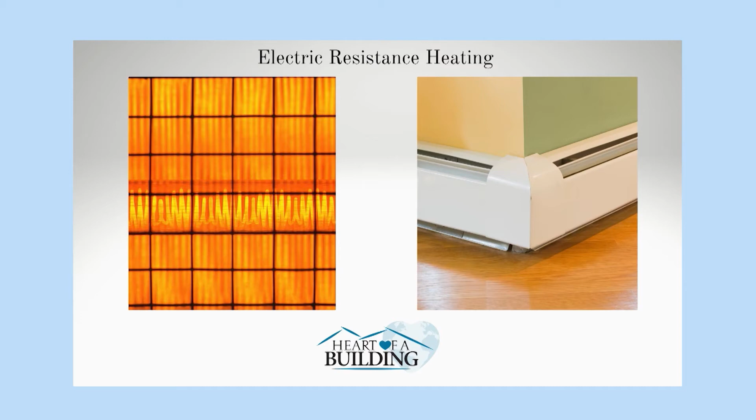One thing I'd like to ask about is a technical detail in the project, the solar water heating part of it. Some people think that's an older technology, but boy, it's going to work for your project, as I understand it. Well, you're correct, it's old technology. The inspiration came from the fact that the number one heat load in those units is hot water. Now, I also knew that I could use renewable energy through the city and my own solar, and I could just pay for the resistance heat. But when you start looking at the hot water that comes out of the shower and goes down the drain and is gone, it was just amazing.

It was just way too much, and so we attempted to recover that. There's no designs. You have to think it up yourself. And then again, through Cody and Lisa, the solar hot water, solar thermal, and when we got the information on that. And so we introduced Laurent Malon from Capital Solar. He's got a great French accent. He's a super intelligent, wonderful guy. He was perfect for the project.

And honestly, that introduction was exactly what Gary needed: hey, this is that cherry that's going to take this project from an almost to something else. Yeah, and that's what's beautiful is the pairing of a great envelope, then simpler mechanical systems, and then bringing renewables in. Like you said, that's really what helps on the carbon footprint side, the energy use per person side.

So that's beautiful. So this is a huge negotiation of using off-the-shelf, cheap resistance heat. But wait, if we go this cheap, we can afford this huge solar thermal system that's going to do all the heavy lifting anyways. Yeah, so that's a great way, and it takes smart, educated people working with smart, curious, educated builders and developers to make that happen.

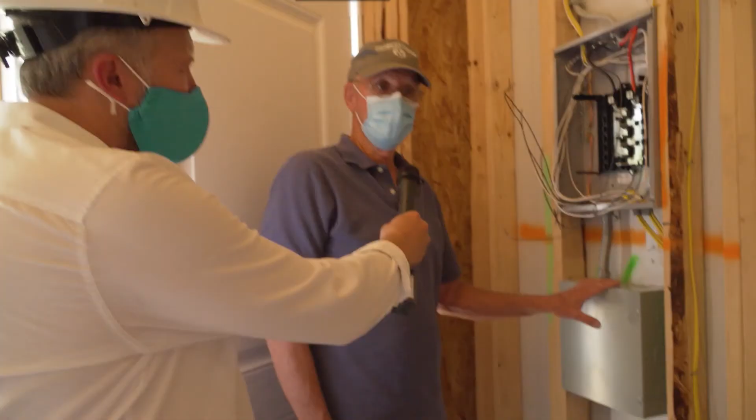One of the smart ways Gary is preparing for the future of electric utility policies is by placing demand control meter boxes in each unit. In the future, every place will have a demand meter. Throughout all units, each unit has one of these. It will shed loads to keep the total demand below a certain level and probably save as much as $2,000 a month.

Well, one of the fun things we found on this one, we went back and forth trying to get it to be a certified passive house apartment building, and it fought back. The resistance was hard and all this stuff. But what we learned was that multifamily is a lot easier to take to passive house certification. Every time we have the opportunity to take one full passive, we run it through the full gauntlet, the ringer.

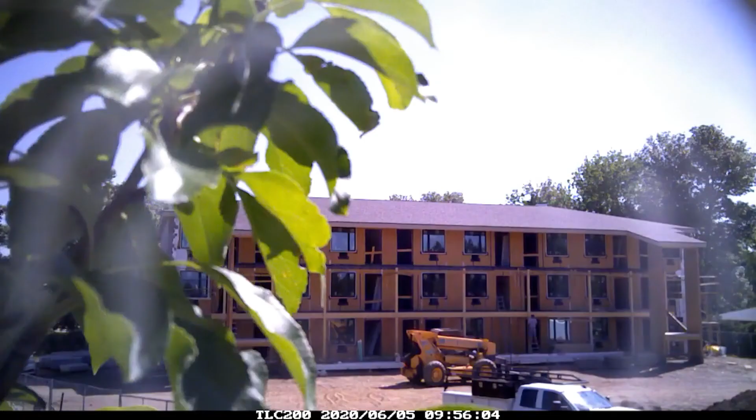This one has bothered me just because you want it to be certified. Colorado needs it, we need a multifamily. We would like to be the company that helps make that possible. But by the same token, it's an amazing building. It's almost passive. It's got all the big passive elements in it. It's going to serve a big need.

I'm dying to do another one because there's just so many things I'd like to do just a little bit better and get to passive house and a little past. Because I see that with a little bit of thought, you could hit that every time easily. And I'm excited about that. But not till this is done. I gotta get this one on the books.

It's amazing what purpose can do to you in the morning to get out of bed and chase it. And I will tell you that when you're in a passive house or a space like this where it's very comfortable and even and it nourishes your soul, it's purpose. Some people find purpose in money, some in family. I certainly do in family. But beyond that, it's making the world a better place, fixing something that is broken.

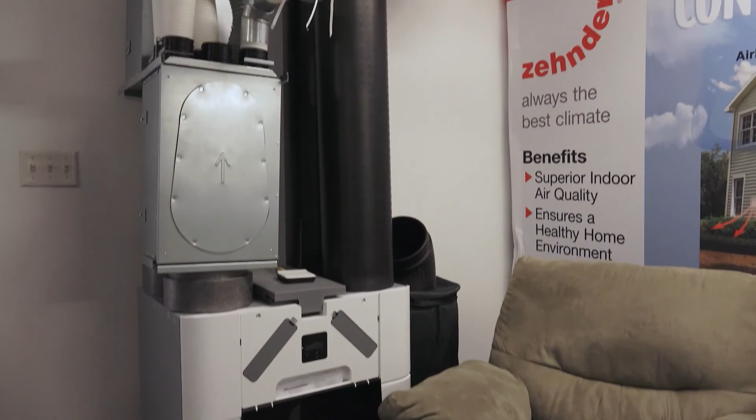Remember when we wondered just how quickly Mainstream's passive house office purified the air? Let's let Cody tell us. Almost half the room is purified within one hour without hearing it. Yeah, thanks for bringing that up. It's wonderful.

I hope these stories have truly inspired you as much as they've inspired me. I look forward to seeing how Cody, Lisa, and Gary's project comes together and revisiting them for an update after residents have moved in. I also look forward to meeting and interviewing other creative designers, builders and developers who apply the cutting-edge designs shared in our videos to create more and more regenerative structures until they become the norm rather than the exception.